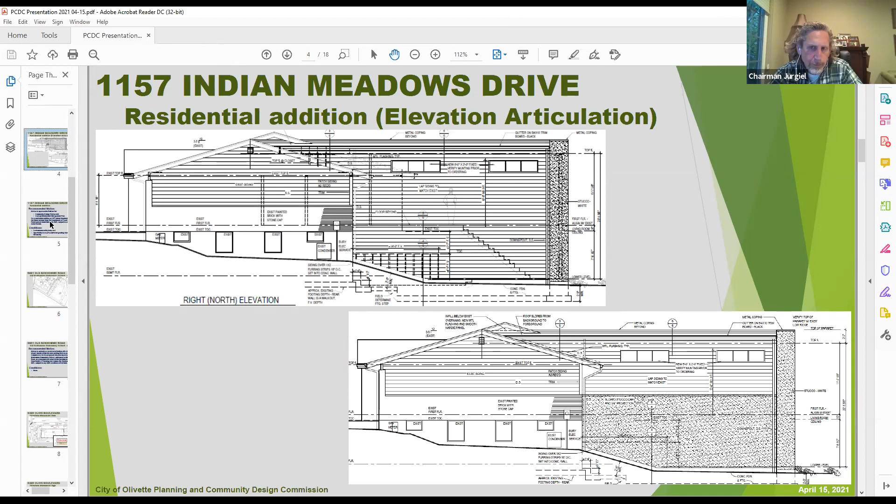Okay, if there's no further discussion, I'd like to entertain a motion if someone would like to make that. I'll make a motion. Go ahead.

Motion to approve the petition for community design review and concept stormwater management plan for a residential addition at 1157 Indian Meadows Drive, as presented in the memorandum from the Department of Planning and Community Development dated March 18th, 2021, subject to any staff conditions noted therein.

Motion's been made by Brian Lewis. Do I hear a second? Commissioner, before seconding that, and I apologize Mr. Lewis, but that should be the April 15th date. No, good point, yeah, I guess March was the original one. So yep, I'll modify that to say April 15th.

Good, motion's been made, and Tim, I think you seconded it? Yes sir, first on the draw. And motion's been seconded by Tim Spiegelglass. Carlos, would you please call the vote?

Mr. Spiegelglass, approved. Commissioner Lewis, approve. Commissioner Rich, approve. Commissioner Wagner, yes. Chairman Jurgiel, approved. And the motion passes unanimously.

Mr. and Mrs. Robinson, I'm going to transfer you back as attendees, feel free to accept guests. Thank you very much for your time. Thank you guys, really appreciate it. Bear with me one second, Chairman. No problem.

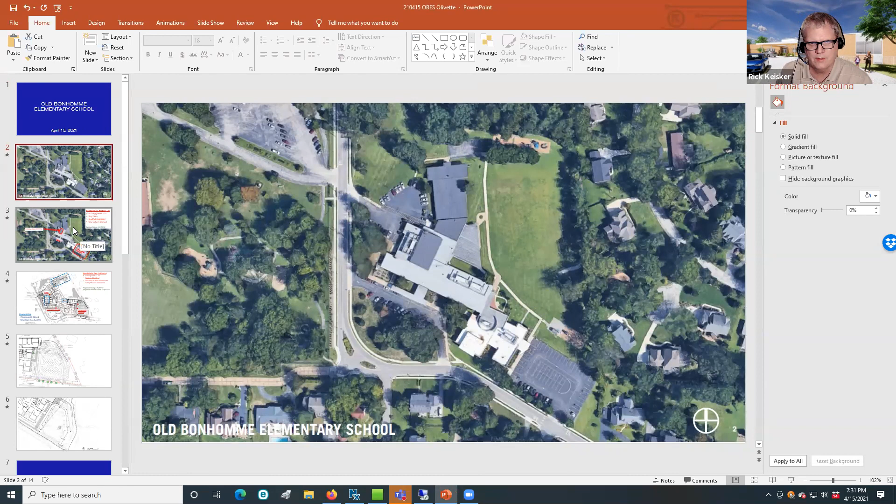Okay, so I just wanted to, I know this was, as Carlos mentioned, discussed back in the planning and zoning meeting in March. So we just wanted to kind of explain a little bit more of the reasoning for this request and explain the differences of this east parking lot as it's existing compared to what the proposed lot is.

So this is the Google Earth image of the site. This is the east parking lot that we're talking about. And right now it's a parking lot that has parking for 65 cars. It's used as a play surface during the day. And the other important function that's kind of driving this whole request is the whole student drop off and dismissal process.

This is where cars go in and out, as everyone probably knows, to drop off kids and pick up kids after school. And there's only one way in and out. The other thing is, so this is a play area. So during the day, even though there's 65 spaces here, there's not too many cars, if any at all, that really park on this lot because it's used as a play surface. Most of the parking is actually happening over in this west lot.

The other thing I'll just point out while I got this slide up here is that it's about 23,000 square feet, this parking lot. And then we have gone out a few times and observed the whole dismissal process. And when we were out there, we observed that there's about 40, maybe a little bit more cars to get on the lot before they start letting cars off. So that's kind of the capacity of how many cars.

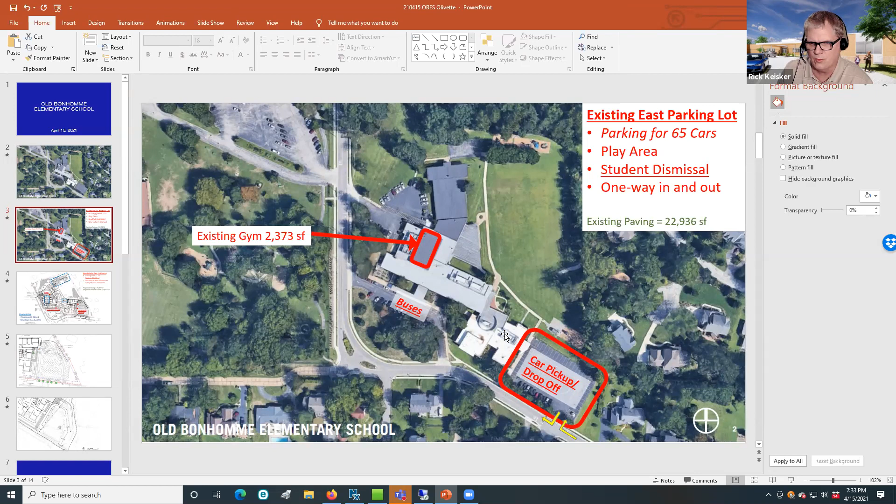And the school has gone through a pretty intensive process of kind of getting this whole dismissal process down to a science, and done a really good job at that. So we're just trying to improve that as part of this project.

So we're improving this by adding about 15 cars that can come in the front here for pickup or drop off, and then another 25 cars that can wrap around here. So you got about 40 cars total. And then you got the internal lot itself that cars could be brought onto for pickup and drop off.

So there's parking, the number of parking spaces is a little bit lower, but we also are using this lot for dismissal, but we're not using it so much for play because we're improving other areas of the site.

We're adding play here, expanding the play area in the north end. And the gym itself, we're tripling the size of what the existing gym is. So there could be some play that happens on the east lot, but that's not really the primary purpose. The primary purpose is going to be the parking and the whole drop off and dismissal process.

So one of the reasons that we want to remove these islands is just to really allow the school to get even more cars on here. These islands that were in here just make it more difficult. We looked at several different scenarios about how you could bring cars in here, and the islands just kind of get in the way, and we're looking at ways you could stack more cars.

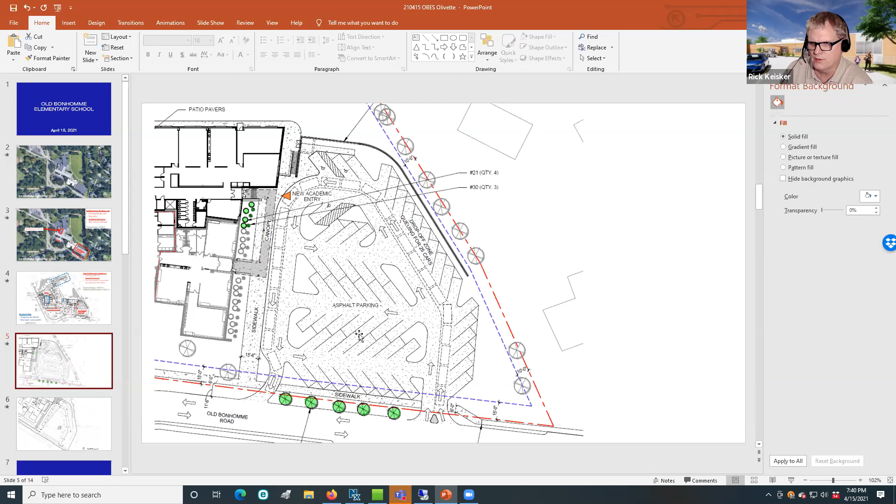You could do that. We were looking at different ways you could bring cars in and have them stack in these areas. If you can see my cursor, these islands are kind of tight, just making these turns. Taking the islands out, you could run cars in different directions. There's probably a number of different ways it could be done, and just taking those out allows the school the flexibility to figure out the best and safest way to do that.

One of my concerns, if you look at the configuration now, as you're pulling through, you have to pull into these spots and then back out. So one of the things we're looking at is trying to figure out a way to stack cars so there's no backing up in parking lots, where we absolutely do not intend to have kids running through the parking lot while there's cars there, but there's always that chance that a kid could walk back there. That's another thing we're trying to look at.

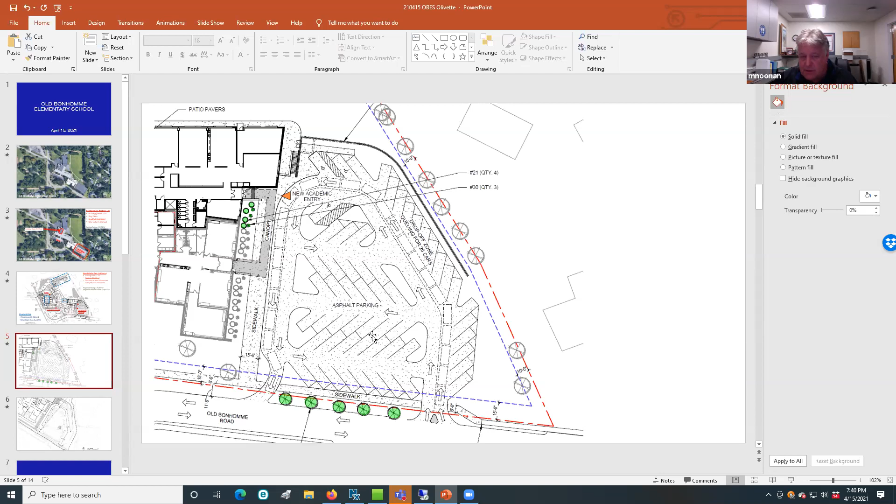The other issue is that we'll be offloading some of the cars usually stacked through the front entrance, for parent pickup or kid pickup there as well. So car pickup and drop off in front of the building, we're hoping, is going to help that too. But I really do understand what you're saying about the traffic on Old Bonhomme, and that has been a primary focus of this whole project since day one, as far as the traffic flow and how we're laying this out.

I'll just add, I did mention earlier that this lot is bigger than the existing lot. And as we've been talking about, we're gaining this area in front as a pickup and drop off. With this curb cut that was granted back in the fall, there's more ways to get cars in and off the site than there is right now. Right now there's just that one curb cut, which is kind of the bottleneck. So with all these improvements, it should be improved from the existing situation.

From a safety perspective too, the outlet from Stacy Park, we've aligned that with ours, so there's not going to be that staggered type stop sign. That was, I think, the main focus from a safety perspective as well, that we have a very simple 4-way stop there versus what we had before.

I just have one. Go ahead, Carol. Yeah. I am in favor of allowing the school district some flexibility with regard to the ultimate design of this lot.

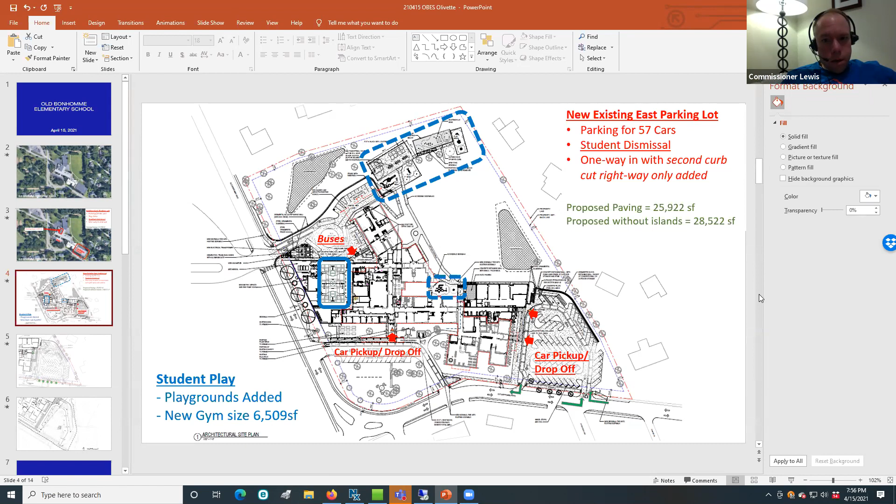Okay, unless there's any further discussion needed, I would like to entertain a motion. Remember to unmute. I'll make it if I can, Carlos, if you can re-present on the screen. Let me just find it here. Yes, sir. Oh, I found it.

Motion to authorize a variation to section 400.1430.b so as to allow these striped islands — correct, islands — within the east parking field as presented before the commission for the proposed interior renovation, addition, and site plan improvements to the Old Bonhomme Elementary School, addressed as 9661 Old Bonhomme Road, as presented and noted within the memorandum from the Department of Planning and Community Development dated April 15, 2021, subject to any staff conditions noted here. Brian, will you also amend that to include that additional requirement?

Amended to: if there is an impact to the number of cars on Old Bonhomme, a traffic study will be conducted to look at options to improve. And let's also, for clarity, say negative impact. Okay, motion's been made by Brian Lewis.

Do I hear a second? Second, and it's been seconded by Jody Rich. Carlos, will you please call the roll? Commissioner Spiegelglass, approved. Commissioner Lewis, approved. Commissioner Rich, approved. Commissioner Wagner, yes. Chairman Jurgiel, approved. The motion passes unanimously, 5-0.

Chairman, while we have Mr. Noonan and Mr. Keisker, real quickly, if you wouldn't mind giving the commission an update on what the schedule will be. Today we received the permit. Well, of course, the bond issue was passed earlier this month. Yep. And earlier today we received the building permit plans and site improvement plans for permit review. Could you give us a short schedule of what you anticipate?

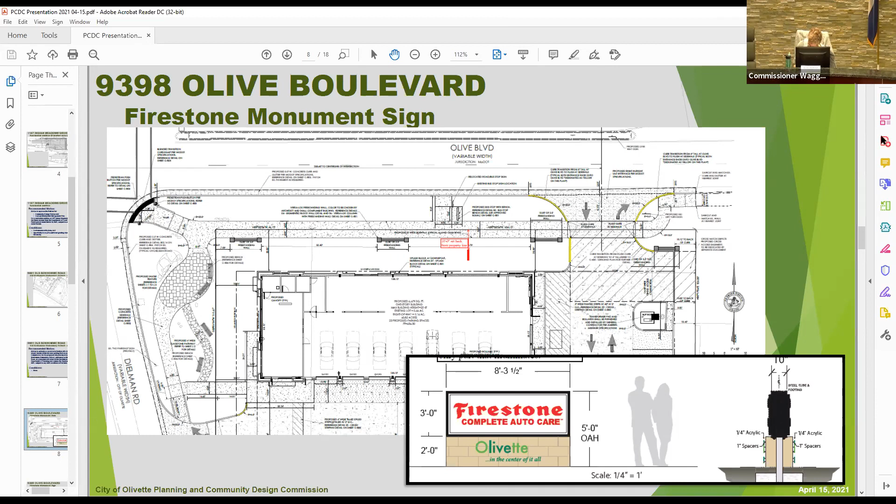Carlos, any public comments? I doubt it. No, sir. All right, unless there's any further discussion, I would entertain a motion that's on the screen.

I'll motion to authorize the placement of a monument sign along Olive Boulevard at 9398 Olive Boulevard, proposed Firestone Complete Auto Facility, as presented and noted within the memorandum from the Department of Planning and Community Development dated April 15, 2021, subject to staff conditions noted herein, and I'd like the condition to be added with flexibility on the final location and design specifications.

Thank you, Carol. Do I hear a second? I'll second. Motion's been made by Carol Wagner and seconded by Brian Lewis. Carlos, will you please call the vote?

Motion to approve. Commissioner Spiegelglass, approved. Commissioner Lewis, approve. Commissioner Rich, approved. Commissioner Wagner, approved. Chairman Jurgiel, approved. Motion passes unanimously.

Thank you, Mr. Gage. Thank you all, I appreciate it. Carlos, we will be in touch. Yes, sir. Thank you.

Okay, I think we'll move on to new business, and this is item A. For this particular item, we're going to have to close our meeting, but then also enter into a public hearing procedure. No motion is required for this, but we just need to specify that when we do this. So this public hearing is related to Birdie Land subdivision of Old Bonhomme Road vacation plot.

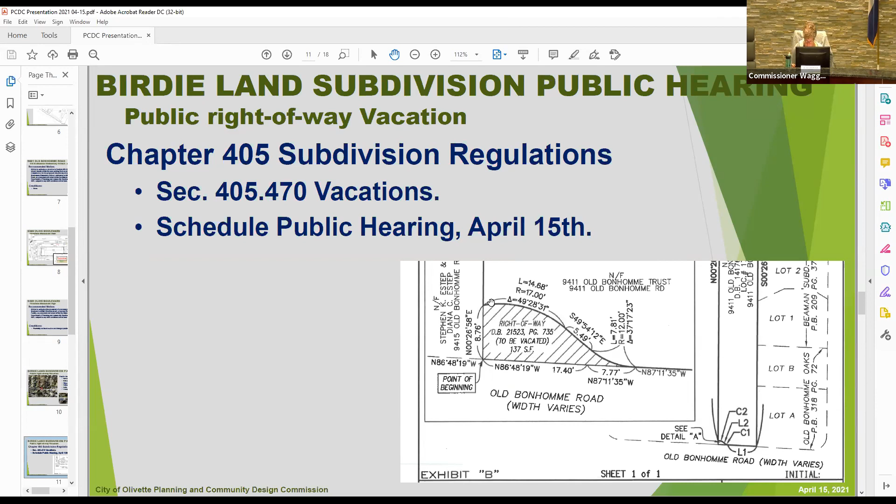You have the legal description, and essentially all that would do is transfer that property into private ownership, and then it will get consolidated in the final plat for the Birdie Land subdivision. It'll no longer exist as a separate piece; it'll be part of another lot and road right-of-way. Be glad to answer any specific questions on that, Chairman.

And again, going through the procedures, we'd like to enter a couple of items into the record, which is part of the formal process of a public hearing. The only question I had was the historic use, why it was even in Olivette's ownership to begin with. Do you know the history of that?

From my perspective, the best response I can give is that driveway apron, for some reason, because this driveway extends on both of these properties, that's a remnant piece of some type of apron that was left out. Okay. Yeah, I think it makes complete sense.

Does anybody have any specific comments or questions for Carlos?

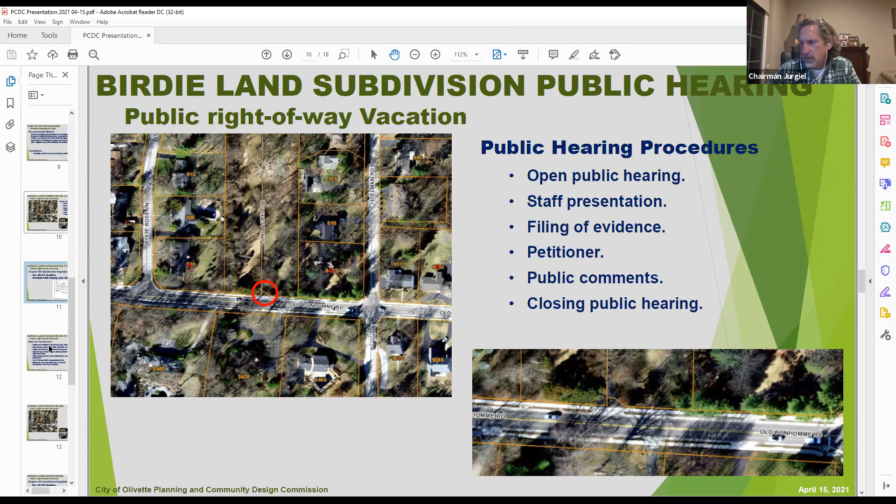Carlos, I don't see any. So do you need to enter these items into record?

Yes, and these are necessary to ensure that the proper public hearing was conducted and that specific documents related to the request and the property grounds were entered into the record. So it gets a little bit formal here, but bear with me.

If I may enter the petition for the preliminary subdivision plat, along with the plat documents that were submitted dated September 14th, 2020, the staff reports dated December 17th, 2020, and that should be March 18th, 2021 and April 15th, 2021, that is today's report. The petition for the right-of-way vacation dated February 28th, 2021, which is before you today. The right-of-way vacation exhibits attached to that petition application, dated January 28th, 2021, including that legal description.

The public hearing notice, the list of notifications, and the affidavit of publication in the St. Louis Countian, and those are part of your packet, your paper packets. The City of Olivette 2006 Comprehensive Plan, the Municipal Code of the City of Olivette, including Title IV specifically our Land Use Code, which includes Chapter 405, our subdivision regulations, and the zoning map of the City of Olivette.

Carlos, the only thing I want to clarify, I believe you mentioned May, and I think you were trying to say March for the meeting date. Yes, or the report date. I apologize. Correct. I appreciate that, sir.

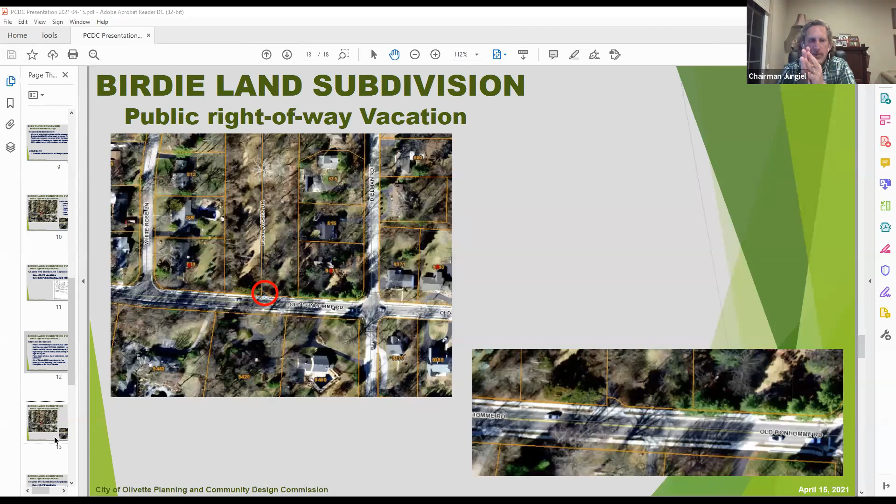If anybody would like to entertain a motion, that'd be great. And I was having a hard time finding the recommended motion, but it's on the screen now. If anybody, I'll make a motion if that's okay, Chairman.

That'd be great, Brian. Motion to forward a recommendation to the City Council to vacate 137 square feet of public right-of-way along the north side of Old Bonhomme Road, abutting the southwest corner of the property currently addressed as 9411 Old Bonhomme Road, as presented before the Commission on April 15th, 2021, and per staff memorandum dated April 15, 2021, subject to any additional conditions approved by the Commission, which there are none.

Motion's been made by Brian Lewis. Do I hear a second? Seconded by Carol. Go ahead, Carlos, if you could call the roll. Commissioner Spiegelglass, approved. Commissioner Lewis, approve. Commissioner Rich, approved. Commissioner Wagner, approved. Chairman Jurgiel, approved. The motion to recommend passes unanimously.

The next step is that an ordinance with the exhibit of the legal description before you tonight will go to the City Council for final approval. Thank you, Chairman and Commissioners. Thank you, Brian, appreciate it.

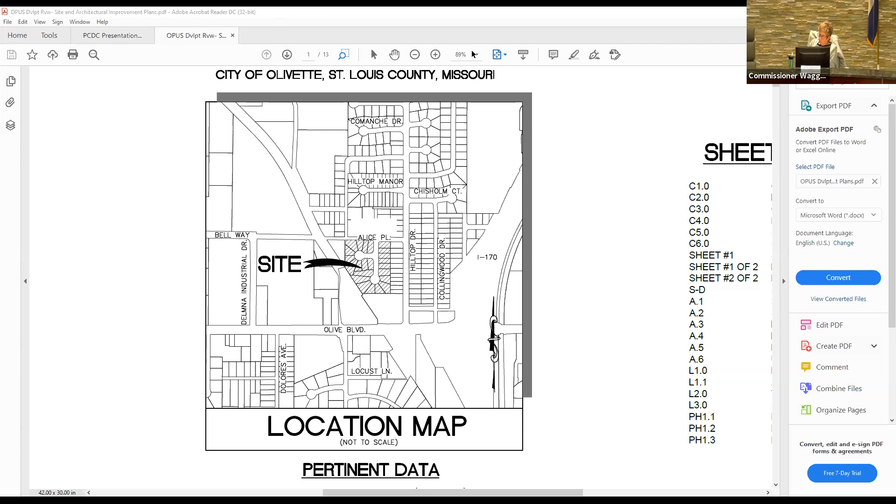So it's kind of nestled between Hilltop Drive and North Price Road, which runs here in a diagonal. Bear with me one second.

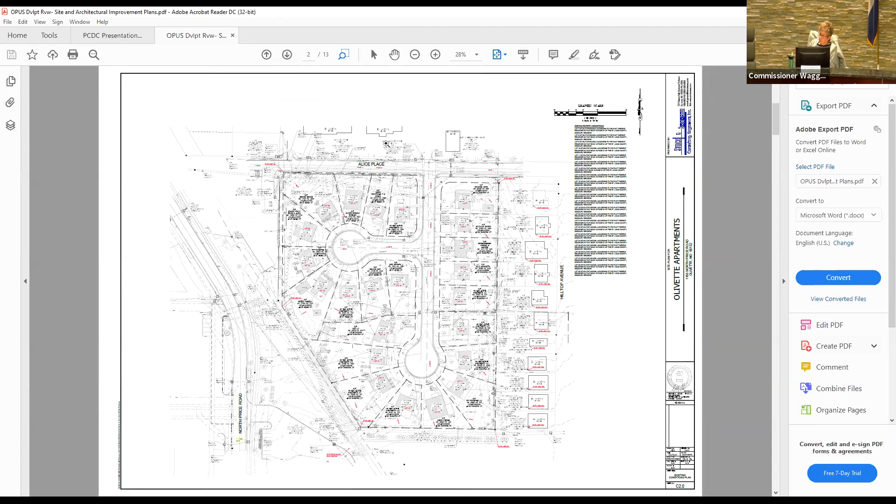Your plans show the existing 23 single-family properties along with the surrounding properties, including those along Hilltop, Chevy's, CVS, the City of Olivette Public Works Facility, City of Olivette Parking Facility, and some residential properties north of Alice Place, which is the northern boundary of the proposed area.

The proposed development plan identified here is to have a 5-story structure with 207 apartment units. Within your tables, you have the identification of the various unit sizes and bedrooms.

On the north side of this plat, there would be some dedication of additional right-of-way to Alice Place. Also, some improvements are proposed along Alice Place, including a new pedestrian pathway running east to west along Alice. We have been in discussions about extending that pathway all the way to Hilltop and then all the way to Price here on the left-hand side.

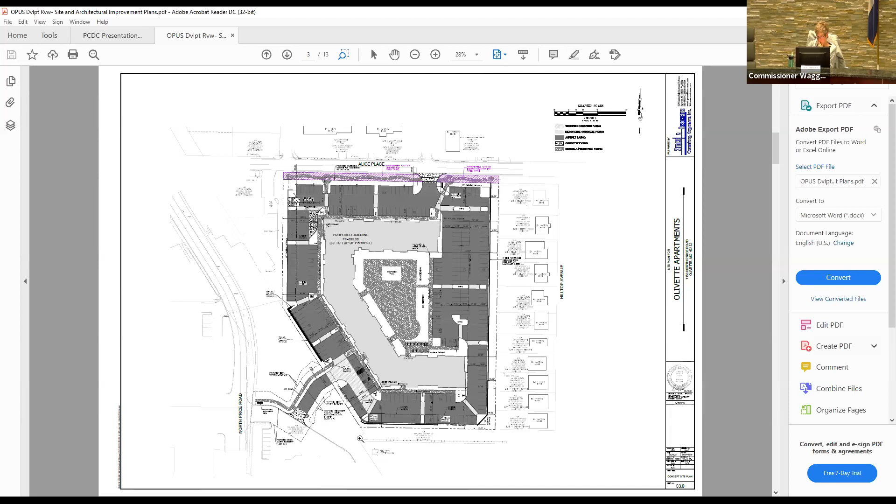Primary access for the development, and the address of the development, will be off an easement that was secured from the redevelopment of the old Beckman property, which is today CVS pharmacy. During the redevelopment for the CVS, the city secured an easement from North Price Road to access and serve potential redevelopment of these properties off of Irvington and Ryan Court.

So back in 2006, when CVS was being reviewed, the city was already making plans and setting in motion preparations that this area was ripe for development. And we knew from the various property owners within this area that they had been entertained and were also reaching out to various developers for redevelopment.

That being said, in the plans you will see we have an access that has been defined off of the CVS property, but we're working with the petitioner to consider various alternatives to move that access a bit further north. That would do two things: one, it helps with the alignment with this curve you see right here, and two, it would help realign with some of the aprons that are here.

Right now on North Price Road, and we'll get into a little detail regarding the traffic impact study, we know we have some pretty substantial backups in peak hours in the morning, primarily in the afternoon when a lot of people are going home from the industrial park. That industrial park, which consists of Dielman Industrial Drive, North Price, and the various streets that extend off of those, had back in 2017 an employment level of 3,500 people. So it's a pretty active park.

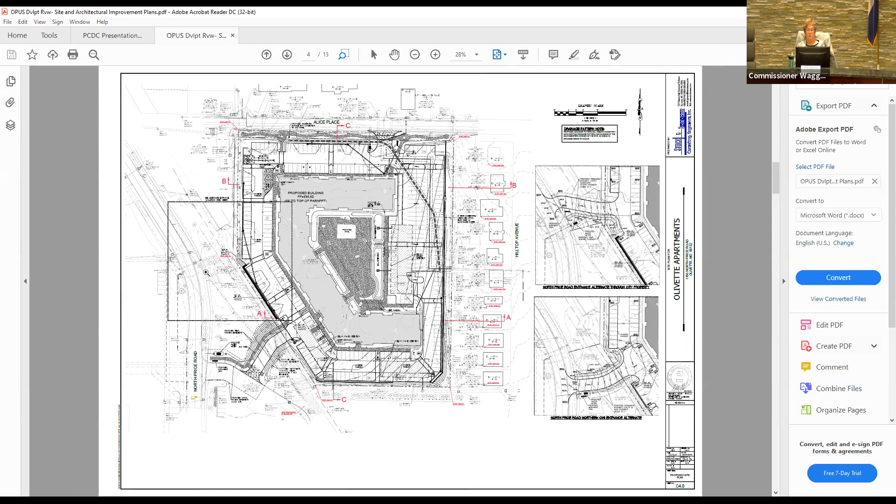You have the stormwater information, part of your concept stormwater management plan. You have various sections of the property, and we specifically requested information on cross sections for the properties that are off of Hilltop and the distances to the building, which you'll see in section AA and section BB. I asked the commission to take a close look at those.

In terms of distances, site triangles and such, they did a good job of identifying this. Section AA is on the south end of the development, section BB is more towards the northern end. So Hilltop Avenue would be off the charts on this end.

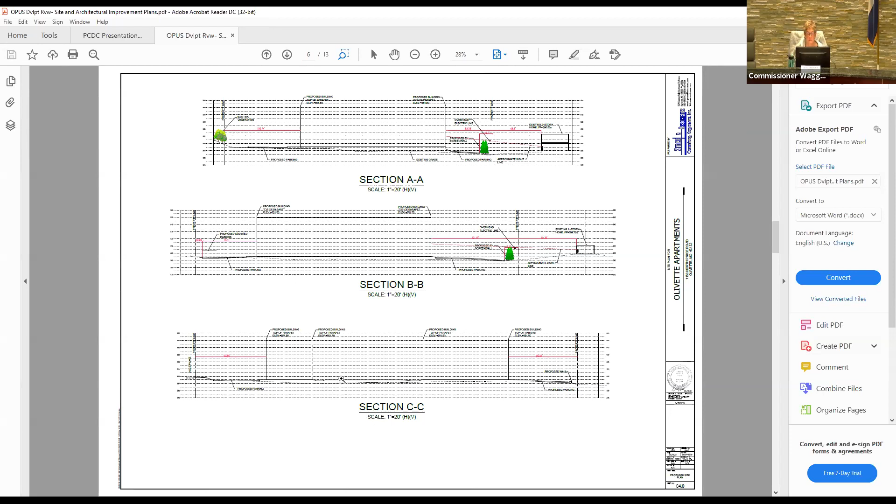You have an improved site plan that is part of your packet. They've worked diligently to try to break up the parking surface area on this site. Part of the request for this redevelopment is to have a reduction in the number of parking stalls required by code. That's part of your packet of information submitted by the petitioner. They would be providing roughly 81 to 82% of the required parking.

They provide the anticipated number that they would have or be requesting per apartment unit, and why they feel that we exceed the necessary number. I'll remind the commission, we also provided a parking reduction to the Oliver.

That one was a little bit easier in terms that the code takes into consideration mixed uses. So they got a 20% reduction in the required parking because they have a retail component as part of the 3-acre city center redevelopment project.

In this case, this is not a retail type of development because it's nestled behind two major buildings that front Olive, and it does not have any commercial access except for that easement off CVS. So this will be primarily residential, but again it reflects that it's something we need to address in our parking code, that the amount of parking required is probably more than necessary, and I feel comfortable with the reduction request they've submitted.

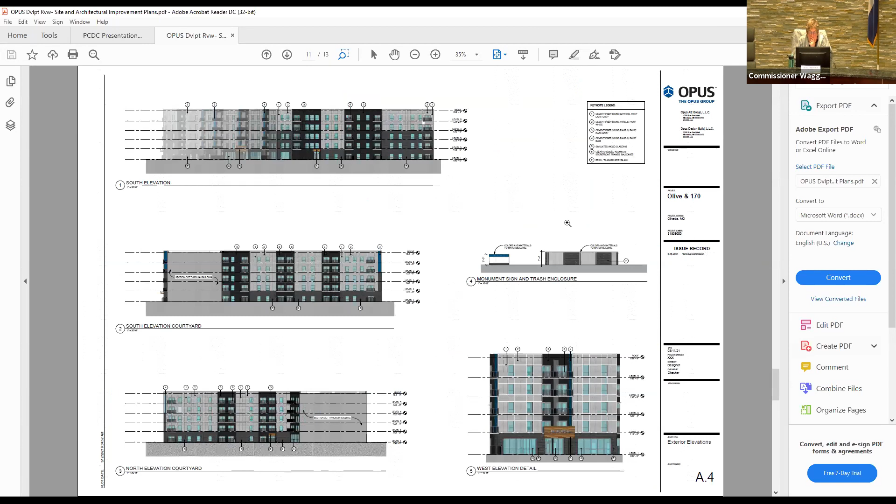Again, you have the various materials and more specific elevations. As part of your packet, you have the internal layouts in there, and this is pretty much close to what you'll see in the third phase before applying for actual petitions. You have your landscape plan in there.

You do have this via PDF because you really have to get in close to take a look at the landscaping. Again, this is Alice Place running here. Along Alice, the sidewalk or pathway, the developer has agreed to work with the city in extending and looking at ways to see if we can extend that sidewalk westward to connect to Price. We realize we do have a pretty big obstacle right here, just west of our Public Works entrance to our gassing area.

There's gas tanks and gas pumps located back here, and then there are various maintenance bays on this side. There's a big depression for a water meter that's in there that we would have to try to address. We also would have to look at our fencing that encloses and secures the Public Works facilities in the back, and what's left out there.

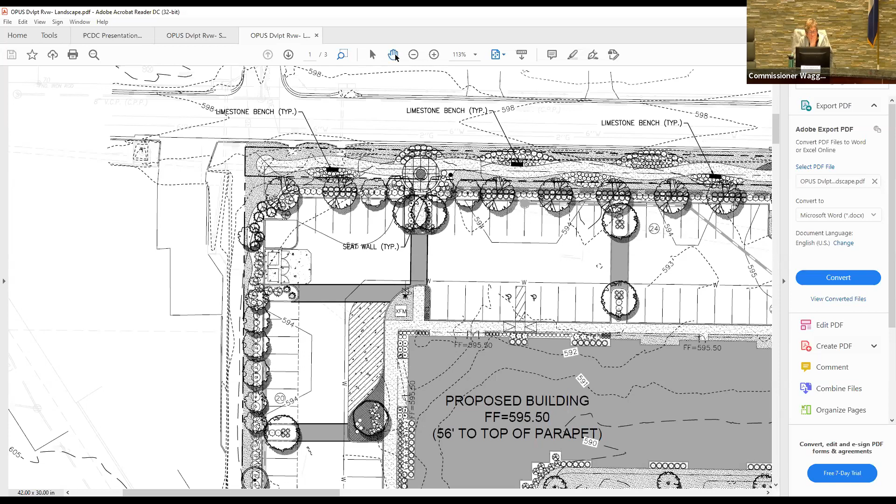On the eastern end, we have been in discussions with them about, instead of terminating this pathway, extending that pathway eastward to connect to the sidewalk that is on Hilltop.

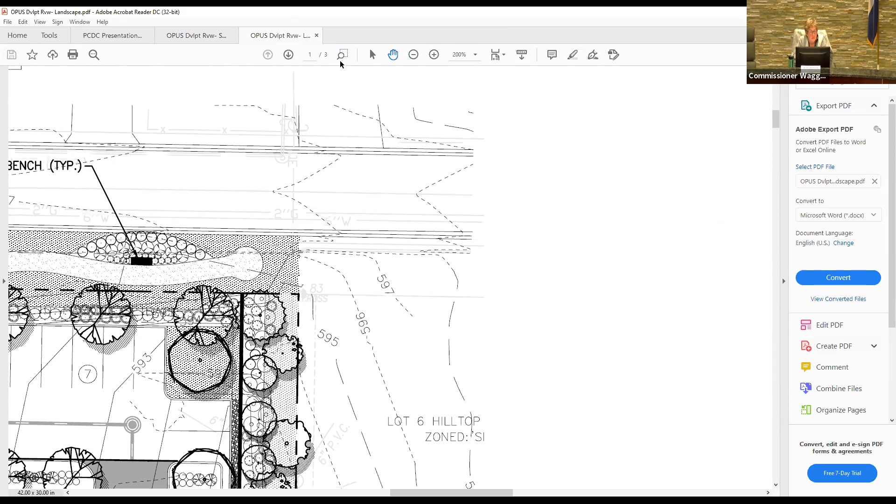So this again will help the city address issues about connectivity and making sure that the Hilltop Arrowhead neighborhoods are fully integrated and connected, both vehicular and pedestrian-wise, with the rest of the community.

As you know, we're working hard with Olive Crossing in terms of providing an opportunity for residents that live in Hilltop and the Arrowhead neighborhoods to cross Olive Boulevard and enjoy the accommodations and the development at Olive Crossing that's going to be constructed south of Olive. So again, the development acknowledges and looks at the connectivity issues that are an important part of our strategic plan.

It addresses the challenges that the strategic plan identified, that it's going to be difficult to do redevelopment and balance and avoid impact to adjacent single family residential properties, and the city has to be sensitive to that issue. In doing so, the city council, through the commission's recommendations, has adopted buffer standards, which include the screen wall, the 10-foot landscape strip, and such, as a minimum means for providing that transition. In this case, the developer is setting the building further back and also increasing the amount of landscaping, or the strip of landscaping, that abuts the single family homes on Hilltop.

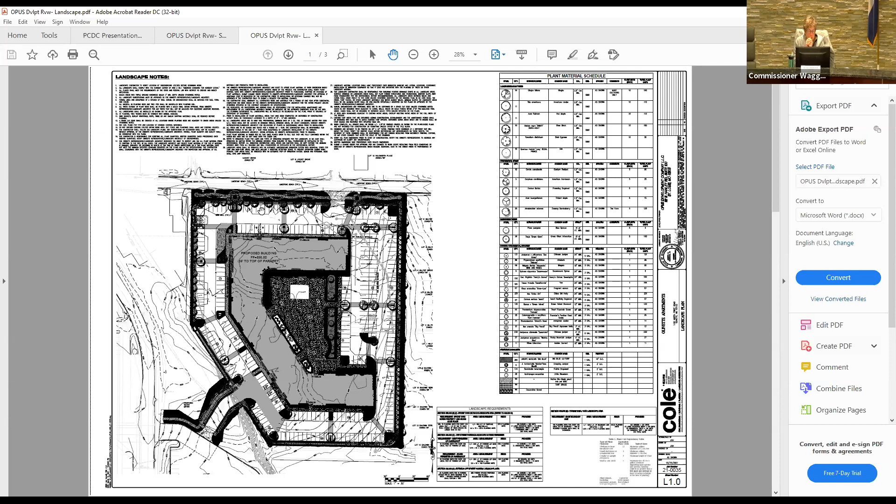And outside of that, I think that addresses or gives you a quick summary in terms of the development review and what you have before you tonight. The petitioner is in attendance. He also has his team, including the traffic engineer and the architect, and would again like to gather general comments and questions on this. The next step in the process, I don't anticipate the commission taking any action.

We have identified some of the code criteria that we would have to discuss, like the reduction of the parking units. Those are outlined in your staff report that was issued. We also need to consider the special permit use for the building height. They're not looking for any variance or special consideration for the building height. It's just that under our code, if you exceed 45 feet, you have to be reviewed and authorized by the commission, just to make sure that the commission considers the site plan review standards, which is to minimize any adverse impact both within and to adjacent sites. It's not a special request, it's just part of that process.

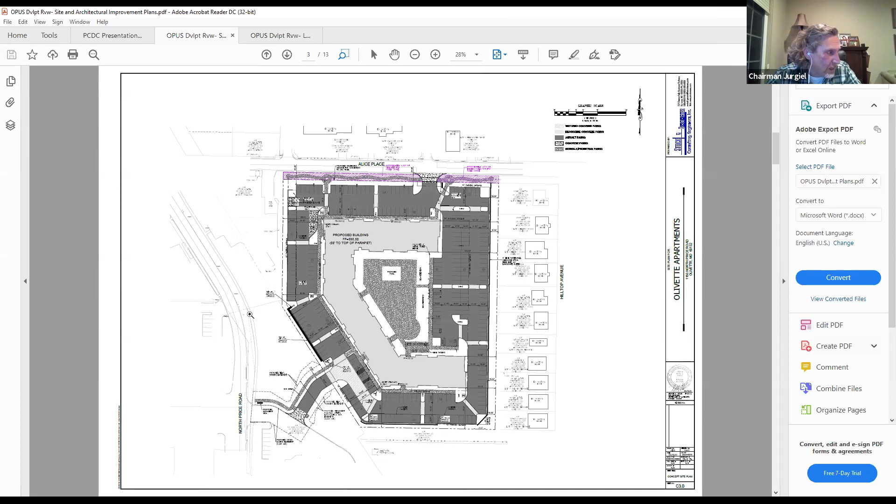Does anybody else on the commission have any specific questions or comments for Carlos? I have a few, but I'll see if there's anybody on the commission first. Go ahead, Brian, I see Brian's hand raised.

I just had a question. I was looking at the traffic study. It listed the number of increased trips, and that makes sense. Overall, Carlos, not subject to this specific development, but with all the new additions we have, the Olive Crossing, et cetera, is there an overall traffic tracking program looking at all the impacts together? Or as they do their individual studies, are they taking into account the other developments we have coming as well?

It's an excellent question, and I appreciate you asking that because it is important. In 2006, with the adoption of the City of Olivette's comprehensive plan, it did identify some priorities and issues that we needed to address with the Olive Boulevard corridor.

The peak volume usage of the corridor was, I believe, in the late 1980s, when there were over 40,000 vehicle trips average per day. There's a certain way the Missouri Department of Transportation calculates it. It was over 40,000 then; today it is at 32,000 vehicle trips per day.

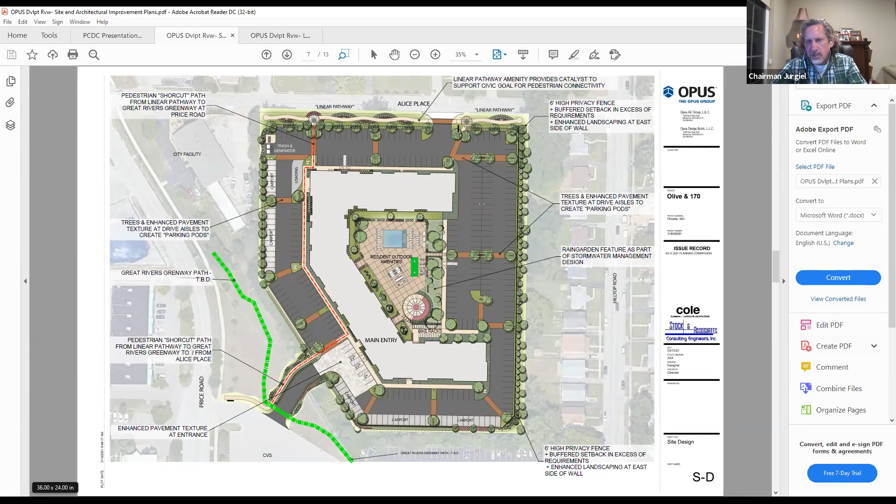Then the only other thing is those depiction, the photos that kind of show the existing building in the different locations. I didn't see that on the report or the handouts. And I believe you said that's on the website. Is that correct? Yes. Good.

Okay, are you talking about those I have up right now? That's exactly right. Yes, they were. I apologize, they would have been in the packet of information that had the building plans. So I tried to break up that file, so they're going to be in the bigger packet of paper that you received on Wednesday. Okay, good, I'll see if I can look through it. I didn't see it in my existing packet, but I'll pull it off the website.

Okay, Carlos, I think unless there's any other questions on the commission for Carlos, I think we should bring on the petitioners. Seeing none, Carlos, if you can bring them on, that'd be great.

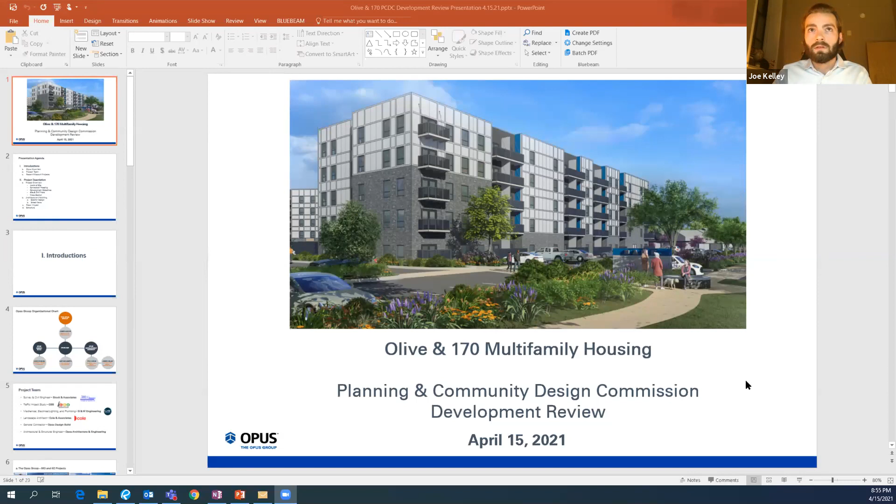Perfect. Well, I'm Ryan Carlie, Director of Development with Opus Development Company. Excited to be back in front of you this evening to advance the approval process for this project. And Carlos did a very good job providing an overview of the refinements that we've made in the additional discussions we've had with city staff. But as a refresher, we did initially meet for the concept review process with you all on January 21st and had our second concept review meeting on February 4th.

And then in between those two meetings, before the first concept review meeting, we held a neighborhood public meeting to gather feedback from local residents. And those preliminary meetings allowed us to garner some really valuable feedback. And we've taken that feedback and made adjustments to the project and look forward to reviewing those with you this evening, along with our architectural vision for the project as well.

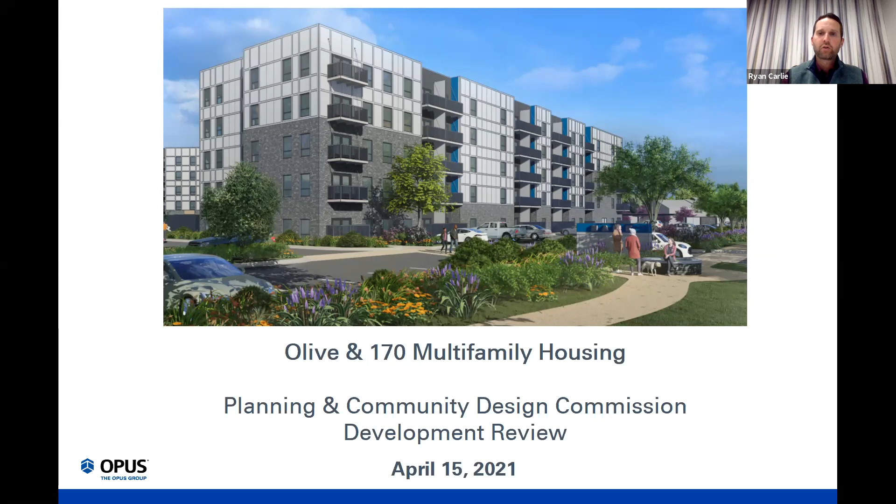So I'll just do a little refresher on who we are as Opus. I won't spend a lot of time on this since you're all familiar with us and we've presented to you before, but we're a fully integrated team of architects, engineers, design builders, and developers. So under the Opus group, we've got Opus Design Builders, our team of architects and team of construction. And then Opus AE is our team of architects and engineers, and Opus Development Company, who are our development team.

We're all located in St. Louis, majority of us. Gary, our architect, is out of Kansas City, but we all office here and live in St. Louis. And then we've assembled a best-in-class professional project team, and we've got majority of representatives from these groups on the call to answer any specific questions that may come up. And there are already some good ones that we'll look forward to addressing here in our presentation.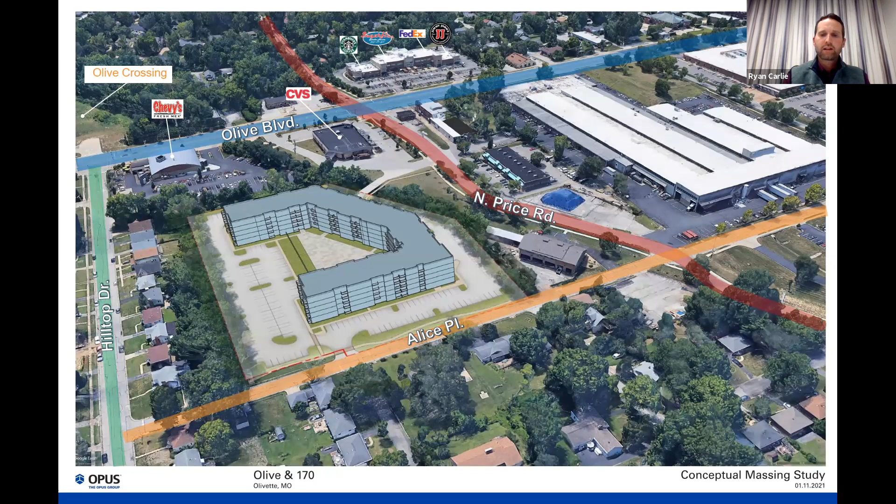To the next slide, Joe. I wanted to review the development objectives, as Olivette has adopted a dynamic sense of place for its strategic plan. That plan has set forth four main areas: community development, economic development, public spaces, and transportation connections. This development squarely achieves those, which we'll review in further detail, but I wanted to highlight that alignment with these four goals now before we get into it.

So we are providing a housing mix here. We'll offer a mix of options and price points through a variety of unit type offerings. As I mentioned, we've got smaller 1 bedrooms, moderate sized 1 bedrooms, 2 bedrooms, and 3 bedrooms, and that'll attract an array of resident profiles, demographics, and ages.

And live, work, play. The residents will have the ability to enjoy our resort style amenities within the development, as well as the public connections that we're proposing to bike or walk to work and social activities, and also engage with the local retail as an additional amenity.

And then economic development, the project will increase the density and design quality while transforming the character of the neighborhood. And that's really what's happening along this corridor with the projects being proposed and underway, is a true transformation. We're excited to be part of that, especially on a site that contains 23 homes approximately 80 years old and over 30% vacant. Not to mention the economic impact.

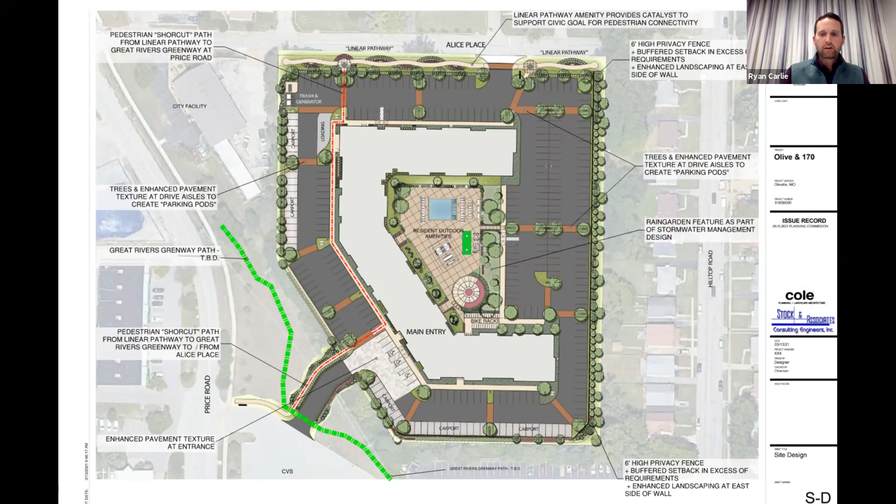That would encroach onto the neighbors around the entire property, not just to the east. I think that does cover it. Yeah, if we want to get into our civil plan, maybe Josh can do a review of how we've accommodated the grade and what our plan is there.

Sure, thank you. So the site today, Alice Place is fairly flat. There's not much elevation change as you head east and west until you get east of our property towards Hilltop. The high point of the road itself is about elevation 598.5, right under the E in Alice Place as shown on the plan here. Our finished floor is proposed to be at 595.5, 3 feet below the high point of Alice Place.

Our main entrance off of Alice comes down into the site to lead into the parking area. Generally around the northwest and the majority of the south side, we're draining out to our curb lines to pick up the stormwater in various inlets. Along the east and along the south side, once we get past the entrances, we steepen the grade across the parking lot to match grade that exists on the east side of our boundary prior to the existing 5-foot easement on our side of the lot line that contains the overhead Ameren easements.

So what you can see is a large dashed, dark line that starts up there by our western node, heads east, has a radius to the south, and then heads southeast. That's the relocation of an existing 36-inch storm sewer, a public sewer that currently is within easement and the various right-of-ways for Ryam and Irvington Court that come through the site.

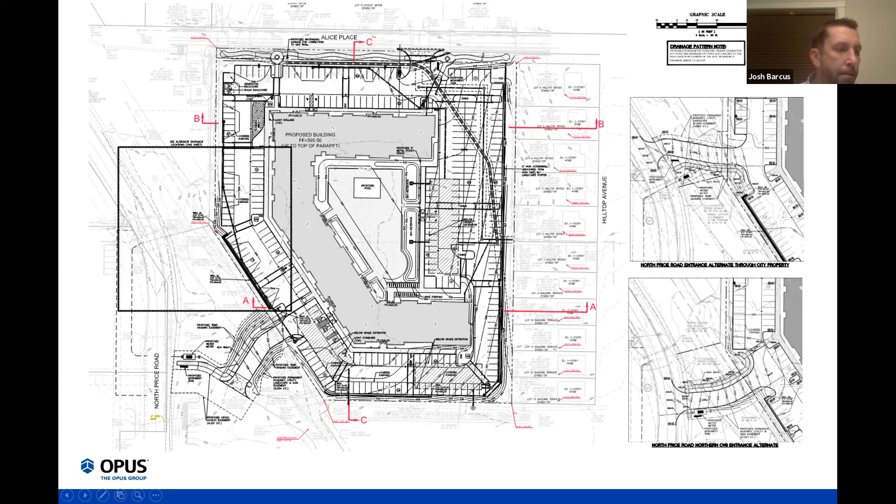The next slide shows the various sections we've cut through the site. Section AA is at the south side, measured from the point at which our building is closest to that east property line. At that point, we are just over 65 feet 6 inches from our building to the property line, and there's another just under 67 feet to the west wall of the existing home. We've shown the dimension of 19 feet from the property line to our parking area, and some trees, though not necessarily at installed height—we'll discuss that further with the landscape architect. We've also shown the overhead electric line and how it plays into any line of sight from that point.

Section BB is taken on the north side, again at the point where our building is closest to the east property line. There, our building is just over 121 feet from the eastern property line, with an additional just over 81 feet to the west back wall of the existing home. We've shown potential line of sight from someone standing in the back of their house looking through a window toward our project. The west sides of both sections A and B are along the city property—section A shows the existing slope coming down with vegetation we'd respect and leave in place, while section BB is close to existing grade.

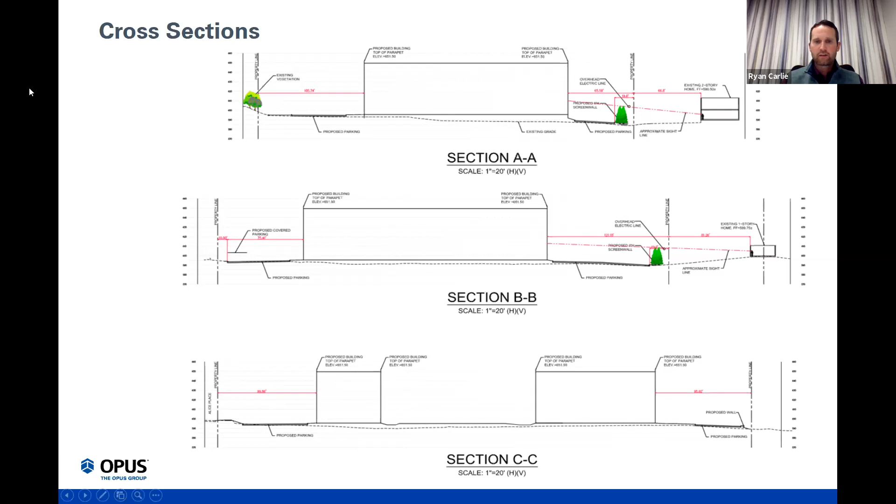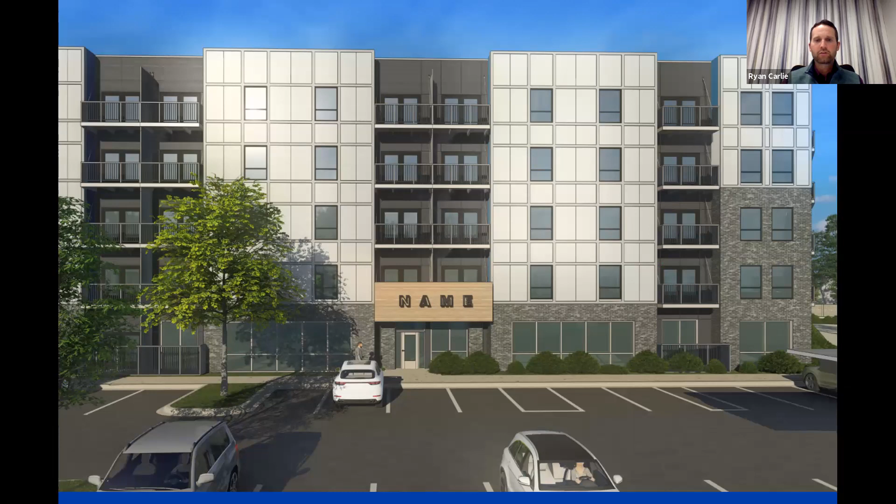So this is a series of renderings showing the massing of the building, the materials, and the articulation of those materials. Where we started with the design is we pick 3 adjectives that would best describe what we want the building to be, what we want people to say about it, and then 3 adjectives we don't want people to say about it. That's to try to target the type of residents, the targeted marketing of who we think will want to live in these apartments and what their expectations are.

What the building doesn't want to represent would be traditional, like lapped siding, beige, pitched roofs, things that lend to a more traditional look. What we're looking for is something current, fresh, and modern. That's the direction we went in, and I think this represents a nice look. It's not meant to be an overly egotistical building, just a nice balance of materials.

We have a base of brick that runs across the entire base of the building, and we've anchored the corners with higher levels of that brick for some variety. In between, we've got a white panel with a 1x6 batten frame that divides up those panels, so we have reveal joint lines and dimensional 1x6 battens. This white color would be more of just a white, and the battens would be an off-white or grayish color to give a differentiation and break up that wall pattern.

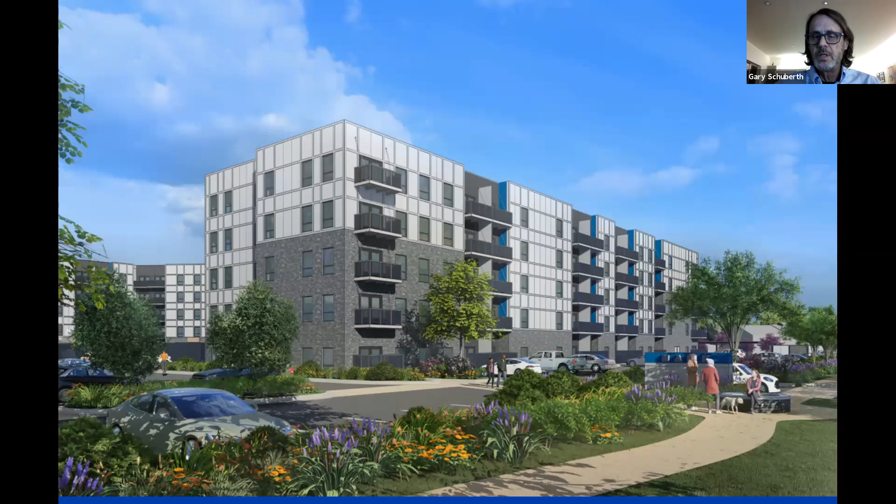The next slide is from Alice Place. This sidewalk you see at the bottom of the page would be the linear park pathway. The people gathering on the right are at that pedestrian node that links to our building sidewalk, one of those pedestrian cross circulation paths.

That node can have a planter that acts as a bench. It could have, we have a monument sign shown beyond that with a blue stripe at the top. What this rendering doesn't accurately represent is that drop of 3 to 4 feet from Alice Place down to our building, so that sidewalk will be roughly 3 to 4 feet above the floor of the building.

On Hilltop, the next slide will show the shot on Price Road, the city facility to the left, and a glimpse of CVS over to the right, and how that drive kind of cuts in there and where our building is. This really shows the distance from the street to our building and what that height and massing looks like.

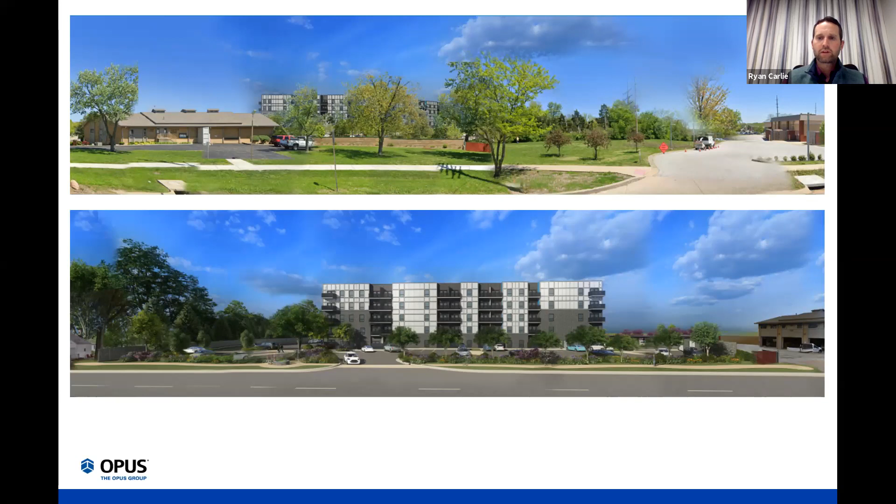I believe that takes care of it. Thanks, Gary. Appreciate it. I think it's worth mentioning, as Carlos did mention, that the homes on Hilltop, we are aware that there is a developer having active conversations with a majority of those homeowners on getting those homes under control to do a redevelopment of that area that would be a little more dense and transitional and complement what we're proposing. So we're excited about that.

Just quickly wanted to review, as I mentioned a few of these, but it was important to point these out. We did have an independent third party complete an independent fiscal impact study, and as you can see, there's significant economic impact on the community as a result of this project over a 20-year period.

First, there was an original conversation or concern over the expected potential increase in school-aged children living in the project. Our consultant took a look at that, and the fiscal impact study expects there would be a limited number of school-aged children. We thought it was worth pointing out that over a 20-year period, the additional tax revenue for the Ladue School District is estimated to be about $4.4 million, and directly about 1.7 million over that same 20-year period.

So just wanted to point a few of those out. Would encourage you to review the fiscal impact study. There's quite a bit of good information in there as it relates to the overall positive impact of the project.

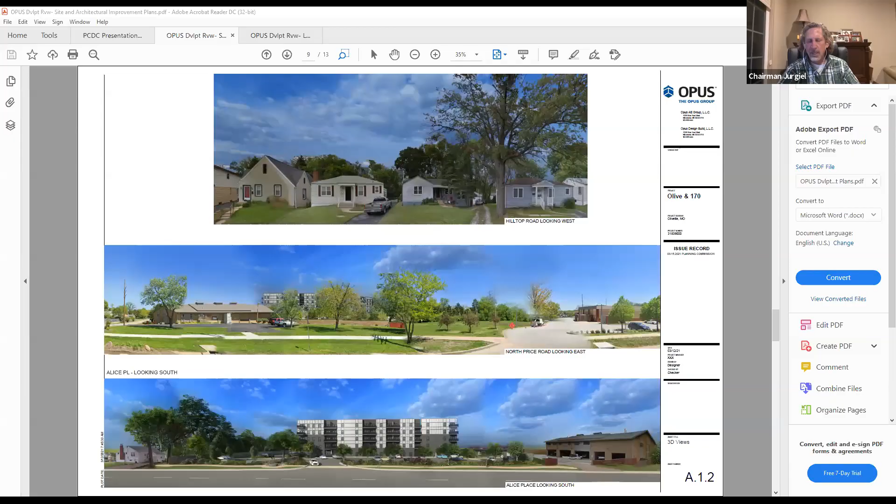Carlos, the only thing I had was some of the balconies on the northeast and southeast that aren't tucked into the building cavities. I want to make sure those aren't just overhanging—we want to respect the adjacent neighbors to the east, to make sure it's not invading their privacy. I don't know if there's a way to tuck those back in somehow, or provide some sort of privacy screening. That's the only thing that gave me a little pause.

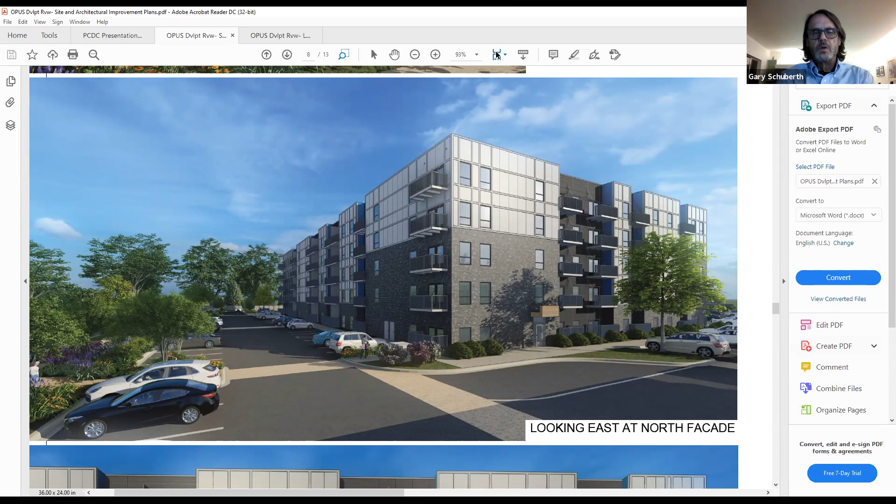Yeah, I might address that a little. Those happen on a couple of the outside corners, and it's a different, larger unit that we have in that area. We did locate those—like the rendering at the upper right—that's the east property line, so it does face that direction.

The balconies do face toward the Chevy's property, not toward the residences. So they face kind of north-south, not east where those residences are. We did consider what you're talking about there, and we could look at seeing if there's a way to tuck that in. It does reduce the size of the living room. This is really why it's different there. It's a larger unit, where they're more recessed it's a smaller, shallower unit. So that's why they look different.

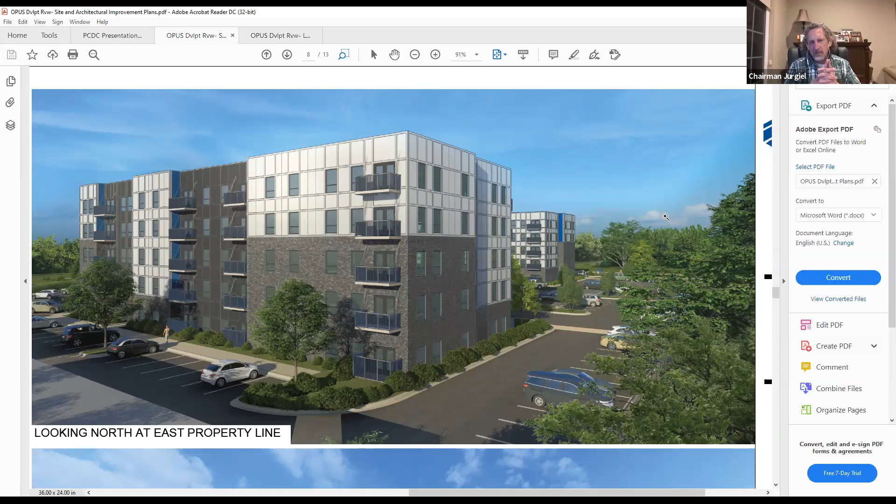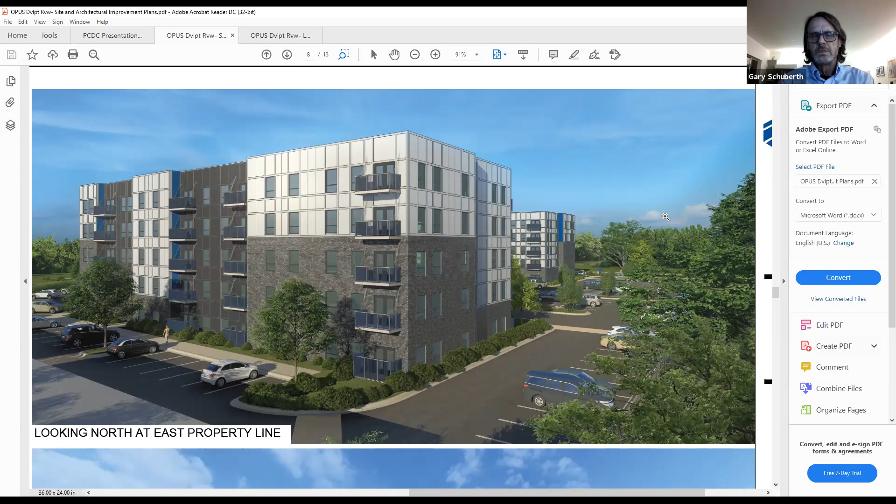If there's a unique way just to prevent that view directly to the east into their property, I think that might help. We could do, but where we have two balconies together where units are right up against each other, more in the middle of the building, we have a vertical screen panel that obscures the view between the two units, so you're not reaching over to your neighbor. We could look at maybe a wing wall type of panel that could help with that. Oh, that'd be great. Let us go back to the drawing board and see what we can do there.

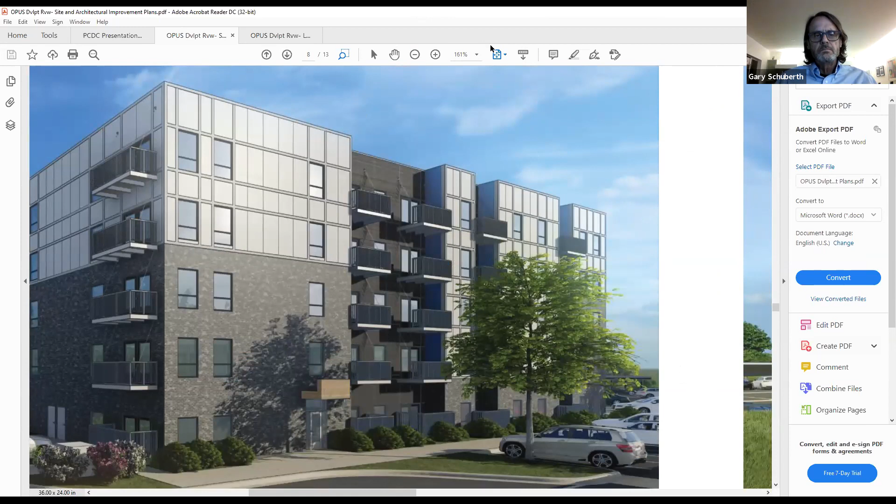And just before we leave, is there anybody else on the commission that had any questions or concerns? I'm kind of scanning and I'm not seeing anything.

Carlos, before we leave this section, I do think we need to check to see if we have any public comments. Yes, Chairman. If there is anybody that would like to speak regarding the proposed petition, please raise a hand. All right, Chairman, I'm going to bring Ms. Ragsdale over as a panelist.

Hi, good evening. I'm Laura Ragsdale. I live at 1130 Irvington Court, part of the redevelopment area. I've attended a couple of the meetings, and I just wanted to say that the new plan looks fantastic and did address a lot of the neighbors' concerns that back up on Hilltop. When I attended the neighborhood forum, their main concern was lights and those kinds of things. I think they've done a really good job addressing that.

I would also agree with the traffic engineer. Olive and Price is a mess now at peak hours, and I don't really see any improvement for or against it. I would love 2 left turn lanes - that would make my life easier right now, especially when I have to leave to be on a baseball field at 5:30. So that would help me out, but unfortunately it's not the case. So any improvement in that area with the development would be significant. I just wanted to address those things.

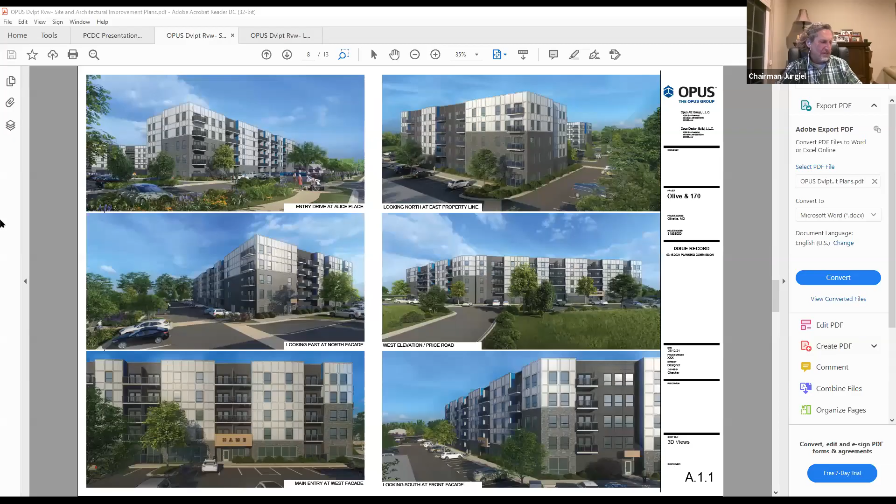Okay, Carlos, that completes new business. I think we're on to discussion items, but I will remind us it is approaching 10 o'clock. So if something is important, I think we should go over it, but if it can be delayed, I think we should consider delaying it.

Chairman, at this point, I would concur. We'll get those set up for the May 6th agenda.

Good, okay, then we'll move on to other business. I don't believe we have any meeting minutes. Is that correct? No minutes. Okay, so now we're just on to reports.

So go ahead, Carlos. A couple of things on the council side. On April 13th, this Tuesday, the council held a public hearing and approved the urban agriculture ordinance with some amendments that were different from the commission recommendation. Primarily, they went back on the number of chickens that would be authorized, from 10 to 6. Outside of that, I think that was the most significant amendment of the process.

Their rationale was that there is a procedure for those who would want more, and they wanted to keep it at 6. There was a lot of questions about the handouts, but again, the handouts were not part of the ordinance. We'll work with them on those.

The council will have a special meeting next week on April 20th, where they're going over their goals and objectives and continuing discussion of the next fiscal '22 budget. They'll have a regular meeting on April 27th, in which they'll entertain the reading of the ordinance regarding the vacation of the Old Bonhomme right of way regarding the Birdie Lane plat. And then they will have another work session on May 4th.